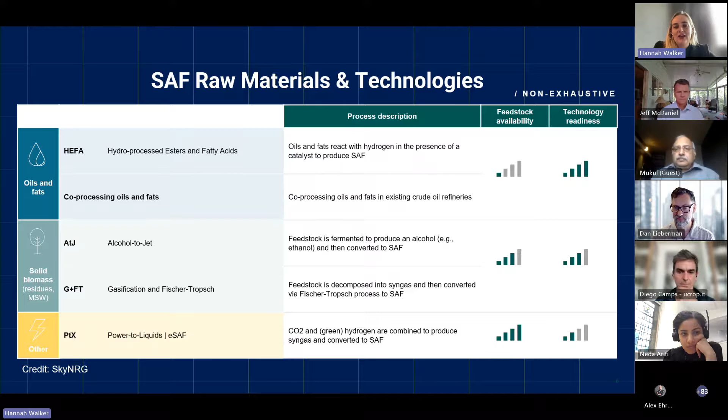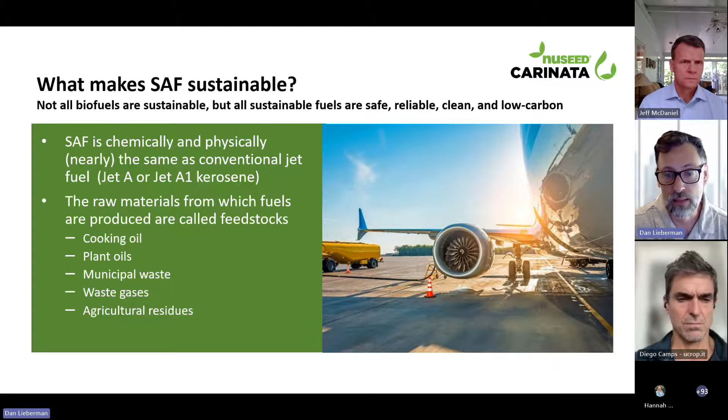And the feedstocks, the raw materials that we use to produce SAF, come from a wide variety of sources. And you see a few here, everything from municipal waste and used cooking oil to purpose-grown crops like the ones we're talking about here today. A few examples are carinata, camelina is another one, pennycress or covercress is another, and each has its own story and its own greenhouse gas and environmental footprint associated with it.

If you remember one thing from all of this, on this slide in particular, you'll see a few different categories of feedstocks. It's that, as I just mentioned already, not all feedstocks are created equal. I was talking to Jeff, who's presenting here with me this morning, last week, and he shared what I think is an excellent thing for us all to remember and repeat, which is that all SAF is good, but not all SAF is the same. Feedstocks come in a lot of different varieties.

A phrase that I like to use at Nuseed and that I've been saying a lot lately is that how you grow bioenergy matters. And how you grow bioenergy is as much related to policy and the value chain and the value proposition, the business model that works. How you grow all that matters, but how you actually grow the crop on the farm, the farm management practices and a slew of other aspects across the value chain impact the result in terms of what environmental benefit we have at the end of the day.

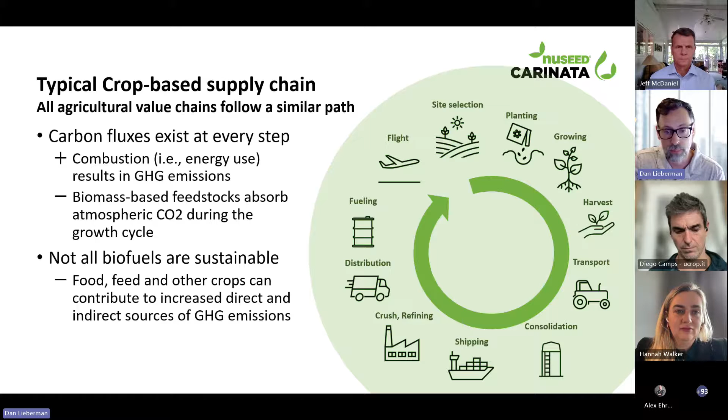Now, let's go a little, whoops, go back, sorry, here. Am I confused? There we go, okay.

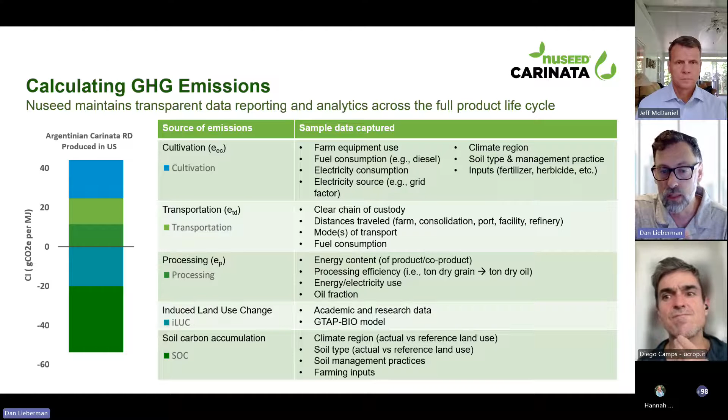Now, I think that puts a lot into when you use the word and think about the word net, as in net zero. This is really how to think about that word net and what that means, because in the end, the net is potentially negative or near zero when you're thinking about fuels that also can introduce the land use change benefit and the soil organic carbon benefit.

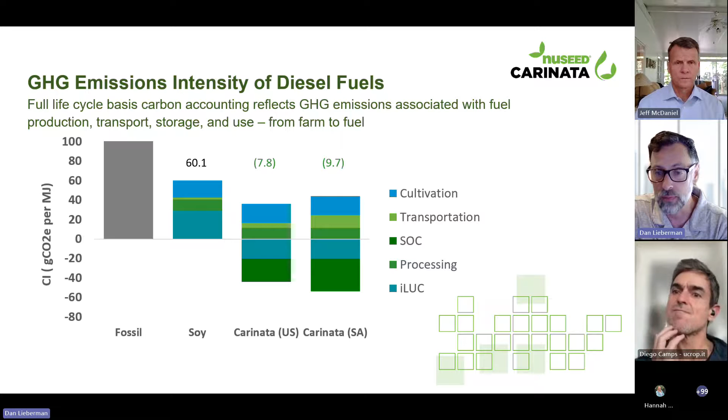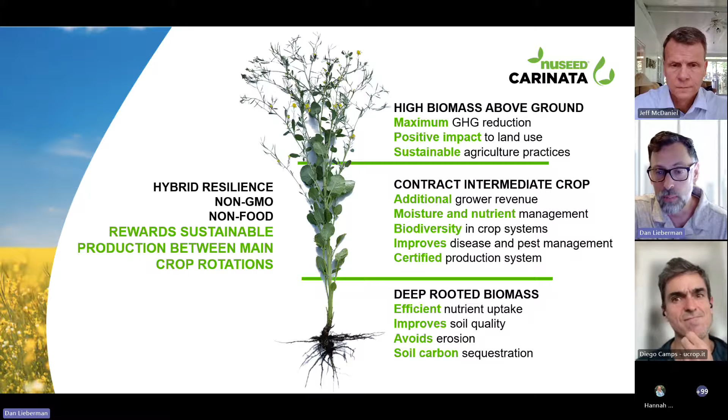Before I wrap up here, this is just a very broad overview of the benefits that purpose-grown oilseed crops can offer. I've mentioned some of these already: GHG reduction, nutrients uptake in the soils, avoidance of erosion is another one. But all of this also contributes not just to environmental impact, but also economic impact. Think about the improved revenues and the additional source of revenue to farmers that they otherwise would not have during this off-season opportunity.

So final slide here. I hope you appreciate that, as I've described, the data capture, the analysis and reporting that sits behind all of this supply chain is a lot of work, but it enables our assurance program.

And now that we can measure all of these, demonstrate all of these, we can start to have conversations about and provide the assurances that we have gone way beyond just carbon savings. And yeah, we can deliver SAF at an 80% emission reduction, or 90, or even 100% emission reduction or more, but we can also deliver on a whole range of other environmental benefits, like improving livelihoods, for example.

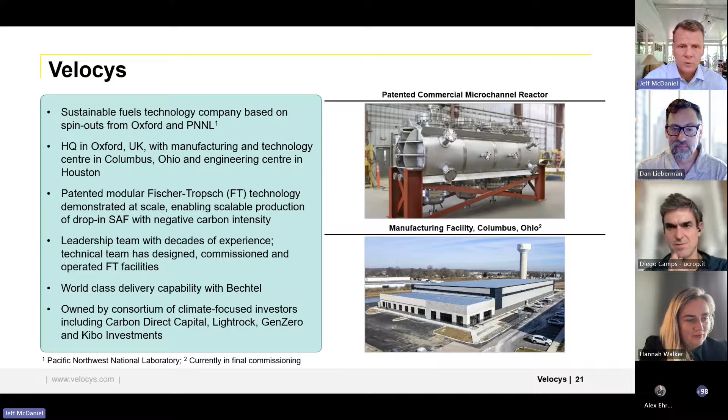And for clarity, when they talk about the three big buckets of how to make SAF, either liquids to SAF or solids to SAF or electrons to SAF, the story I'll share here is around the solids to SAF, and specifically gasification through Fischer-Tropsch. So what does that look like? Well, here are the specific steps. For the engineers in the room, we could dwell on this for quite a bit, but I know we have a really broad audience, so I'll spare you all the gory details.

I'll just say in all cases, we're starting with a solid residual waste, and that waste could be wood chips, MSW, or agricultural residues. It's some type of solid cellulosic material. Now, Mother Nature's made it really hard to convert those sort of materials into SAF. You've got to go through a number of steps, and they include sizing the material, separating out materials that can't be converted. Then you go through a high temperature gasification or syngas generation step to convert the solid material into a gaseous stream.

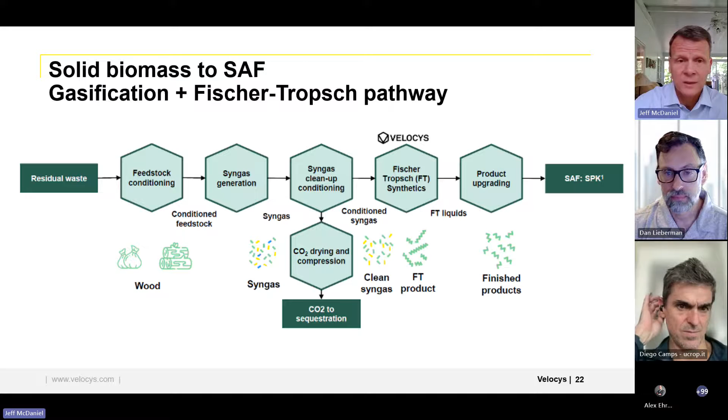Then we need to remove the impurities, including any biogenic CO2 that's co-produced in the process. And then finally, once you have those gas molecules, that's conditioned syngas, that's where our technology steps in and rebuilds those small molecules into longer chain molecules or synthetic crude. And finally, we're going to finish it off and go through an upgrading process to produce the finished product. And while there are different versions of SAF, as has been highlighted before, all SAF is fully fungible. And when blended with conventional jet fuel, it is jet fuel.

I will highlight one other point in this process: if you're separating out the CO2, it does afford you the opportunity to compress that CO2 and sequester it. And if you're doing that, then you're sequestering biogenic CO2. And that's another pathway for being able to achieve negative carbon intensities and deliver greater carbon savings to the aviation industry.

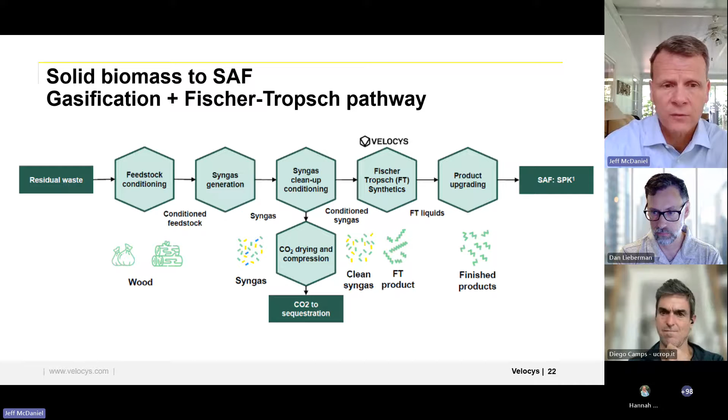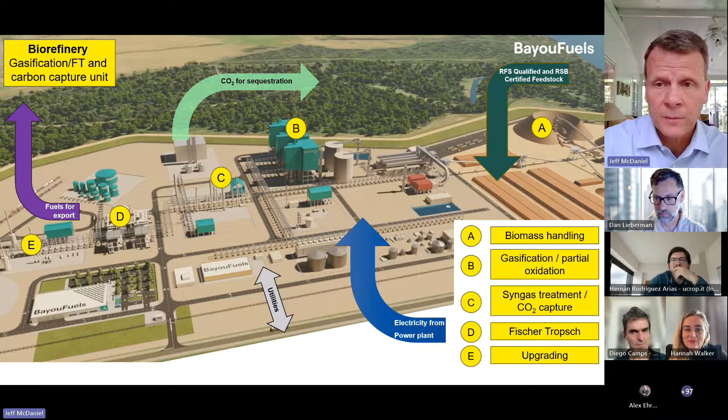We have the CO2 that we're sequestering in a nearby saline aquifer, so it's permanently put away. And then we will be shipping the product via rail. Our intended market, at least in the early days, is California, since they have a premium structure that is very receptive for SAF and other renewable fuels.

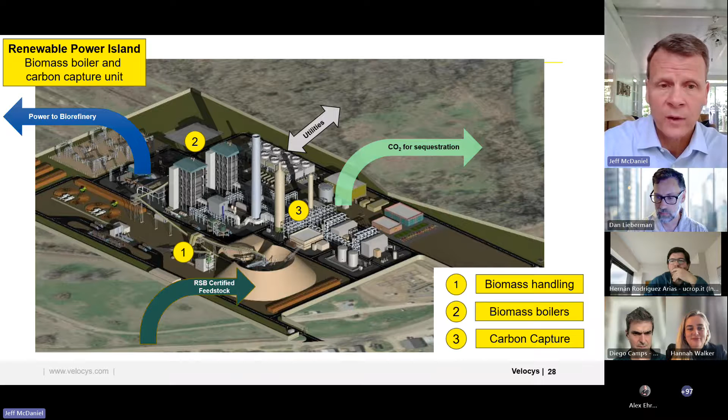Just a quick picture, this is the power plant itself. As you'll see, what I'll highlight here is, again, all of the feedstock that's going in are basically wood chips that are forestry residues, and they will, just like with the biorefinery, be RSB certified.

So when we start to talk about the feedstock, there's two questions that come up for this sort of facility. One, do you have enough of it? And two, how do you make sure that the feedstock you're bringing really is sustainable, is something where you're producing benefits for the surrounding community and for society at large?

So for that first question, we've had a number of evaluations done. If you were to ever come and visit our facility there in Natchez, Mississippi, you would certainly see very quickly, wow, there's an awful lot of pine trees around here. This is one of the most prolific woody biomass growing regions in the world. So they have extensive privately owned pine plantations.

Where we are located used to be one of the largest paper mills in the country that's been closed down for some time. So there's infrastructure and lots of folks with plantations who would love to be able to supply us with material. But we've gone through the independent study, and we expect that we can have more than twice as much feedstock being generated on an annual basis as we will need within a 100-mile radius. So all this material will be delivered by trucks on a regular basis. So we're confident that there's enough biomass.

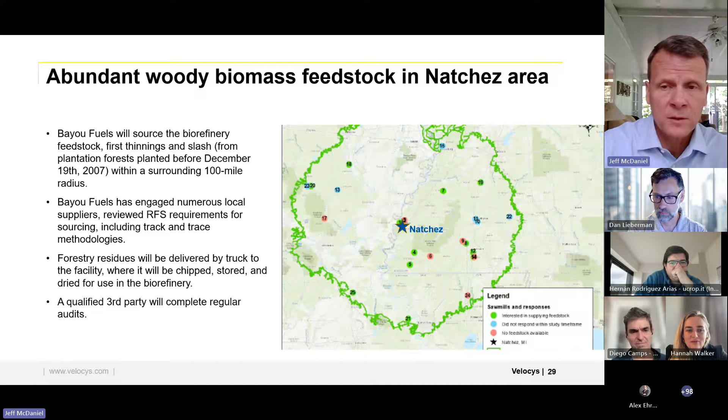So the second question, well, is it a sustainable biomass? And there's several things that we've done there. I'll highlight two of them. One, we have worked with the private firm EcoStrat, who's done their own independent assessment, which was funded by the Natchez community. There's a framework for evaluating various biomass feedstocks that was developed by EcoStrat and Idaho National Lab.

It looks at a whole host of categories in terms of what's the robustness of the supply chain, and can these various sources meet the required standards, because there's a whole host of standards. It's not just the RSB standard at the international level, but there's the renewable fuel standard in the US at the national level. And then there's the state-specific standards that you have to meet as well. So that's one of the steps that we have taken. You see, we got a AA score, so not quite the AAA, the perfect score, but a really good score, and one that we're proud to be part of.

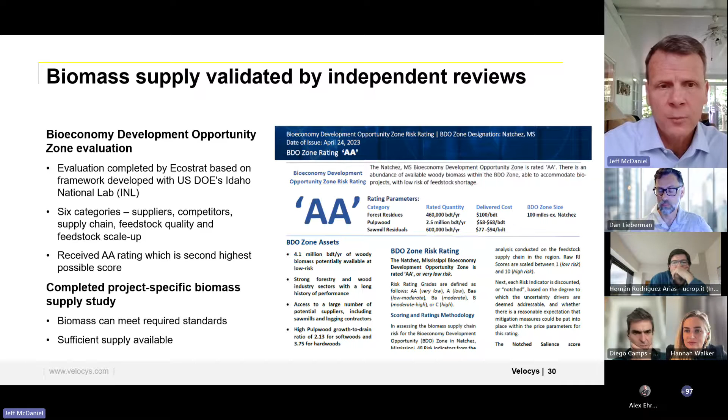And then importantly, the last slide that I'll have here is we have been working closely with RSB for quite some time. We had an initial evaluation or audit, and Alex is going to talk about all of the different criteria that get used for any of the certifications. We went through that process several years ago, and we were deemed as low risk. In other words, there's a low probability that we wouldn't be able to get certified.

More recently, RSB has come out with a draft standard amendment specifically focused on woody biomass. So there are a whole host of questions like, what about the carbon levels in the soil? What about the impacts on various species, etc.? What specific types of woods are being used? So we're the first company that has begun the evaluation and completed a preliminary audit. So we had boots on the ground, as they say, in Natchez, Mississippi, and visited 13 different plantations where we might be sourcing woody biomass from.

We haven't yet produced the report, which will provide public guidance in terms of how to meet this. And to be clear, we didn't get 100% check marks. There's more work to be done, but I would definitely encourage folks who are considering the use of woody biomass or other solid biomass to work with RSB to begin this process, because it helps you see, okay, we got A, B, and C done. Oh, but D is going to take a little bit more work. Oh, and E, that's going to take a lot of work. We better get after it, begin laying the foundation so that as we're ready to move into production, we can have a fully qualified and certified source that's going to be regularly audited and reviewed.

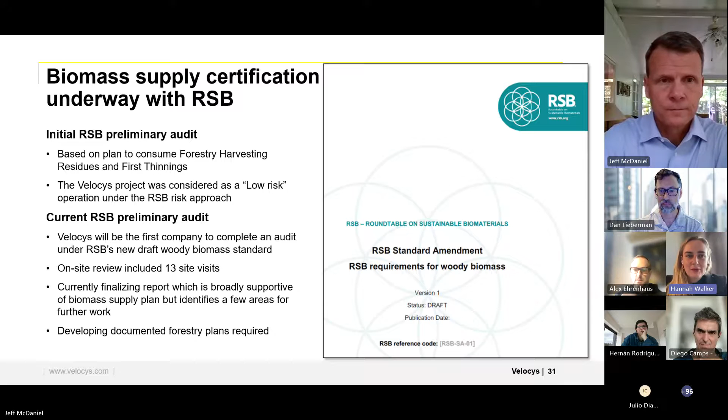Thank you so much, Jeff, for that fantastic presentation. And indeed, it was really special to visit the reactor plant in Ohio back in February, and incredibly inspiring to see the huge investments and technological innovation that you're leading on. So looking forward to seeing the projects that you're working on in the US and the UK come online, unlocking a whole lot of capacity.

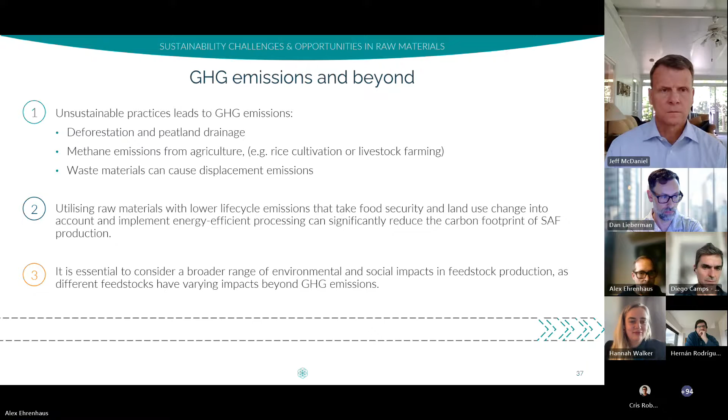So how can feedstock production impact social and environmental outcomes? When you think about a crop, you have a community surrounding the area of production, and you have cultural practices associated not only with how that crop is farmed, but also with how the relationship between the production sector and the communities is. And there are several types of issues that one can come across in different types of geographies or realities, including indigenous rights, child labor, land grabbing, direct or indirect land use change, biodiversity loss, impacts on soil, etc. So these are very negative aspects associated with feedstock production.

But of course, there is a solution. And the challenge is then to be able to supply the demand for food, feed, fuel, fibers, and other needs and materials without causing negative social and environmental impacts in the context of a still growing population and a growing demand for these types of products.

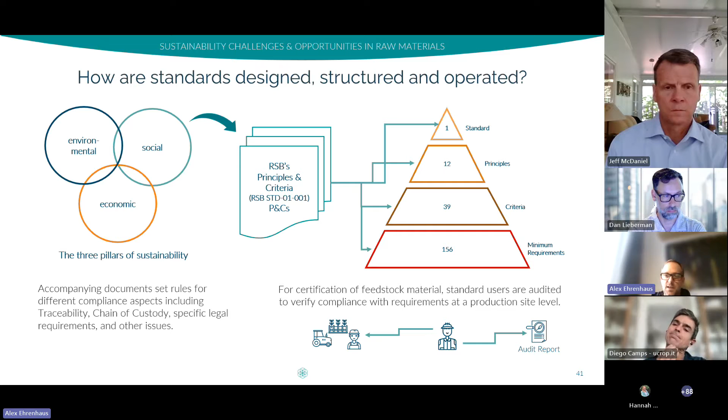So basically, as you can see, through application of a standard which is adapted to the context, for example, in the RSB standard for principles and criteria, there is a very unique principle, which is food security. That principle is context specific. So that means that you have to do a diagnosis based on what is happening, not only on your farm or on your several farms or your sourcing network, but how that sourcing network impacts the communities that are being affected by that activity. So with a standard, you go beyond a farm level.

You're able to ensure that feedstocks are sustainably produced. You can reduce the risk of fossil depletion, as I've given some examples of. And of course, you can contribute to climate change mitigation by implementing all these measures.

So again, here, this is an issue of scope in the RSB standard system. So in our case, sustainability is relevant for all SAF raw materials. And this means that the certification covers primary biomass feedstocks and also waste and residue feedstocks, including from bio-based and non-bio-based materials like recycled carbon.

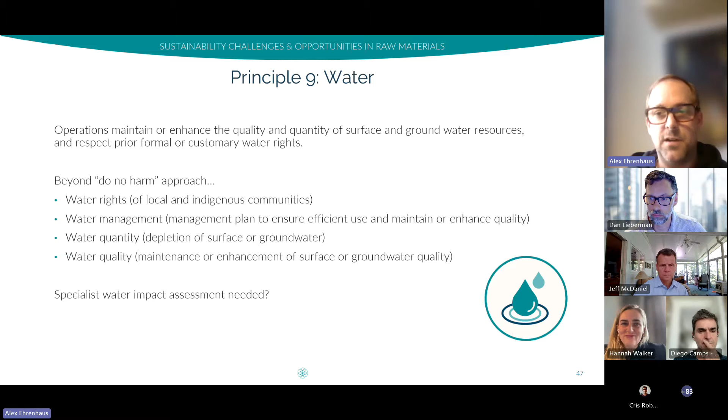So I'm a little bit out of time and running through these last slides a little bit faster. Additionally, there is the low ILUC risk biomass module from RSB. It's a voluntary module, but you can attach it to the audit and certification system. And it's a module that enables you to ensure that you haven't created indirect land use change through displacing different activities.

And last but not least, I think Dan also raised the point about claims. Of course, any standard and certification system also has specific procedures to guarantee that these claims can be made and what type of claims can be made.